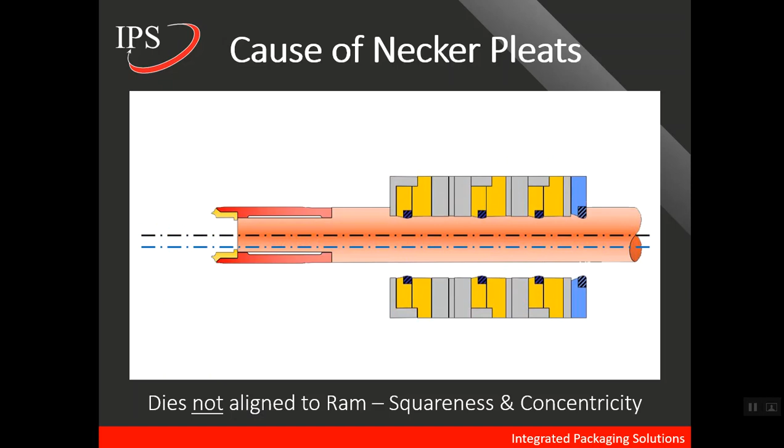Necker pleats are caused by dies that are not aligned to the ram. And when we talk about alignment, it's important to talk about both squareness and concentricity. So because the tool pack has its own center line, when it is not on the same center line as the ram, what will end up happening is that the metal ironing is not balanced.

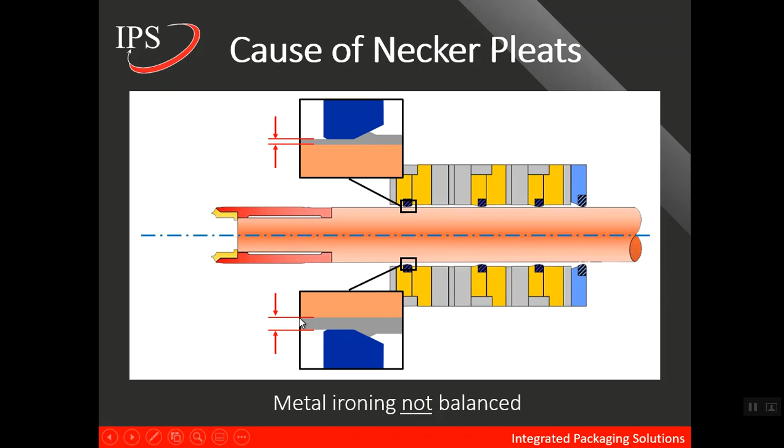And we see here in these detailed views that the top detail has less metal than the bottom detail. And so this results in top wall variation, which in essence is a wall thickness variation at the top of the can.

Now, Sencon is a well-known name in our industry, and they make a great line of reliable and durable products for can inspection. And in this video, we'll be looking at their fully automated Master Series front end gauge. Now, this gauge is capable of measuring dome depth, trim can height, as well as can wall thickness. And the can wall thickness, it's capable of measuring at 12 different heights. And the gauge can be programmed to any customer specifications that are required.

For the purposes of this video, what we'll be doing is looking only at how this gauge measures wall thickness.

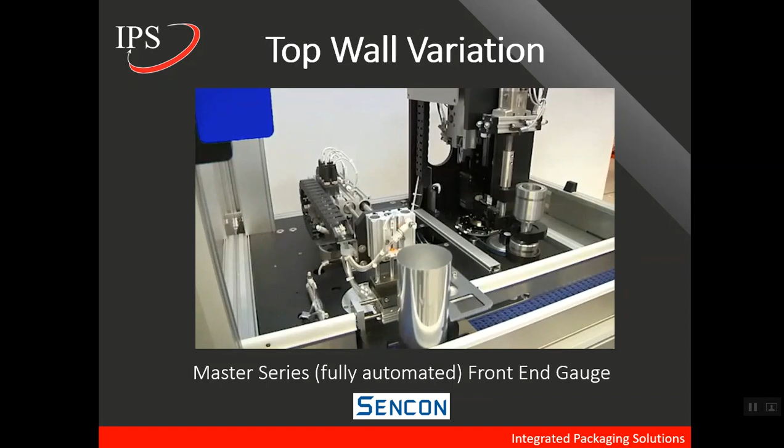But as you can see here, the probe comes down and measures the top wall thickness at various radial locations around the can. And if there are significant differences, it means that there is top wall variation. And where this causes problems is in the necker.

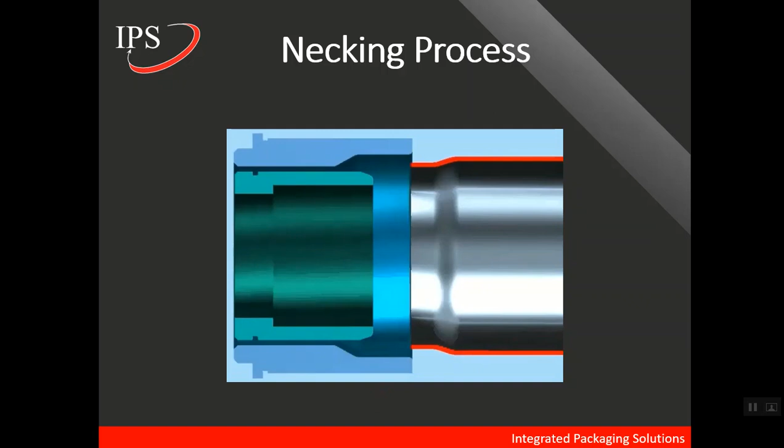So when looking at the necker process, we'll look at a section view of one of the necker stages. So this here is the necking die. Here we have the knockout, and of course the top of the can. And we'll quickly show an animation of the necking process. So just like so many other processes in can manufacturing, necking requires balance.

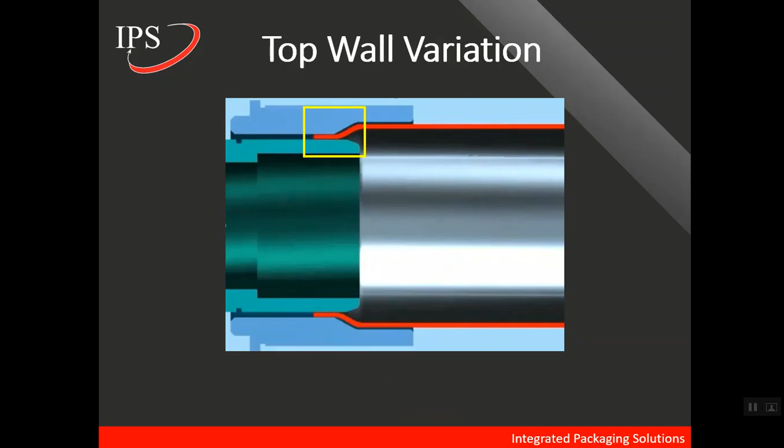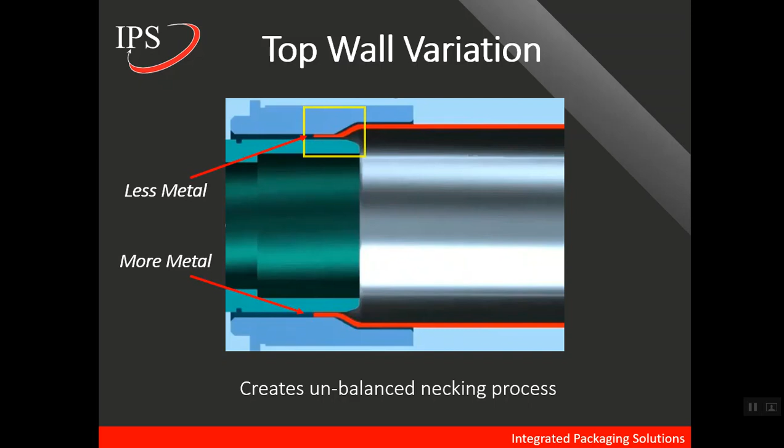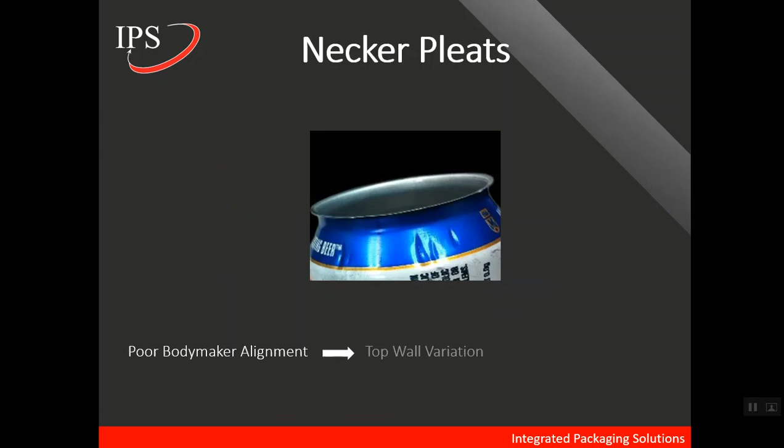And so when we have top wall variation, as we see here, you have a necking process that is out of balance, meaning that one side of the can has more metal and the other has less metal. And so the side of the can that has less metal, this is where we have the potential to see necker pleats. So if we walk this all the way back to the beginning, this all started with poor bodymaker alignment, which led to top wall variation and eventually necker pleats.